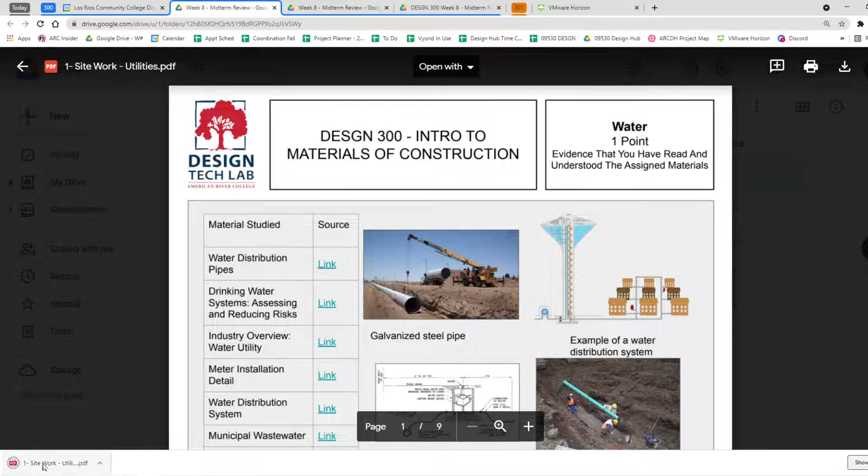So what I'd like to do is go over some of these and just make some comments as to what I'm seeing. Let me go ahead and download this one and then open it up, it'll be easier to work with. I don't have annotation tools on here, it would be good if I was doing this in something else, but let's take a look at this. So as I review these, I always look to see what's supposed to be done.

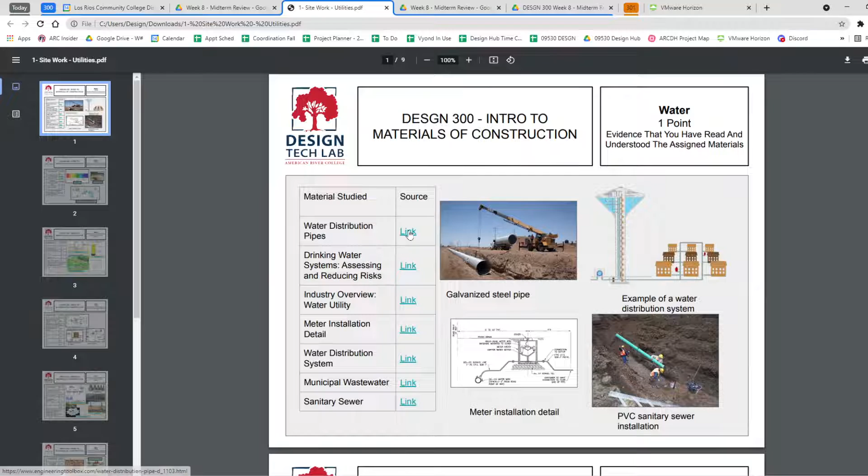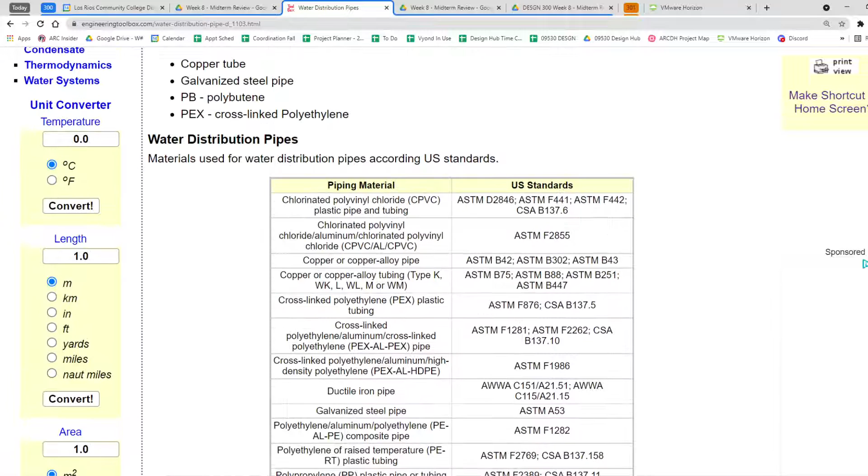It says show evidence that you have read and understood the assigned materials, which is about water. So the first thing I do is look over here to find out whether you've hit the links and looked at the materials given to you in the readings. This one I see a lot, and I can even follow these links to water distribution pipes and talk about copper tubes and piping materials. So, yep, that was one of the ones that we looked at.

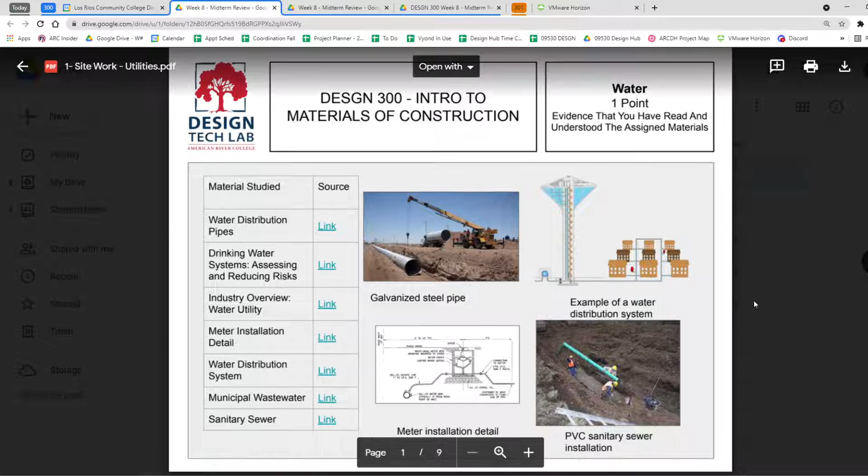And drinking water systems - this is a really good one right here, actually. It's blanked out right now, but this is right here: why are drinking water systems crucial? Serving high quality water, so that's good to know. So I look at these, and then I look at these to see if they're really giving the idea about how water works. This is one, and I recognize it from one of the readings, so I know that was there.

You might be asking questions - well, why are they doing all this? Why pump all this up and then let it come down? Why not just pump it? Those are some really good questions you might be asking, and there are very good engineering reasons for it. If you become a hydrologic engineer, an MEP - mechanical electrical plumbing engineer - a hydrostatic engineer, or just a water system designer, you'll eventually be told about all that.

And I really like this one because it's showing an Archimedes pump, which is really cool. They're showing just enough pump pressure to bring it over to here, and then they use an Archimedes pump to bring the water up. And then, of course, they can do that at a slow rate and fill this up. And then when the water is needed, you have a constant pressure until it totally depletes this reservoir at the top. So it's a way of buffering, so you don't have to have such a big pump - you can have a smaller pump that's running constantly, and the positive displacement pump is very, very efficient. So this one's really cool.

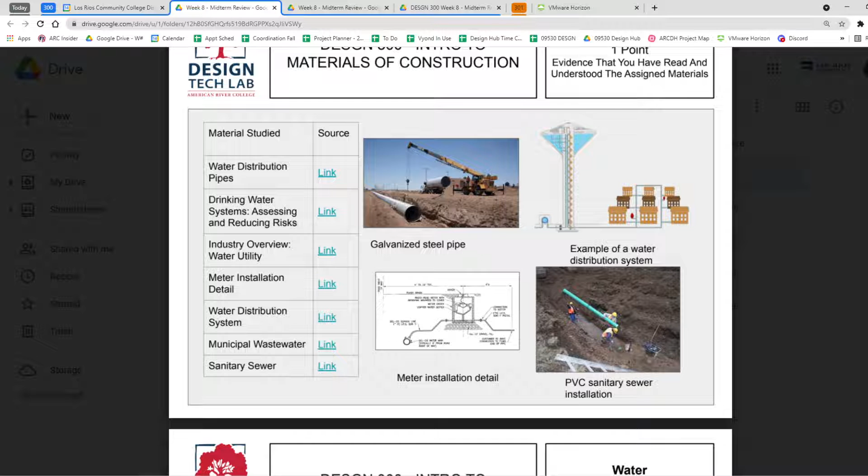I like this one, I like to be able to talk about it. Okay, showing that water comes and it's part of site work. This is nice, showing water and site work. So this one has a lot that is cool about it.

This one's also really cool because it brings a couple of other items into it, and this is nice because this is a new one for me. I hadn't seen this graphic before, and it really does explain a lot when you look at it, and it's well marked as to what I'm looking at here.

It would be nice to have a little bit more about why pH balance is important and what it should be at. If you have perfectly neutral water, that's actually bad for your pipes, it'll corrode them. Usually you have slightly alkaline or slightly acidic water, normally a little toward acidic, not so much down to number 6 on the pH scale, usually in the 6.25 to 6.75 range. If it's perfectly neutral, it's too corrosive.

Another thing that I like about this one is that it's got keywords, because keywords will allow you to do more research later on. Now, some of these, I don't know what customer advances means. I don't know what CIAC means. So those would be kind of cool.

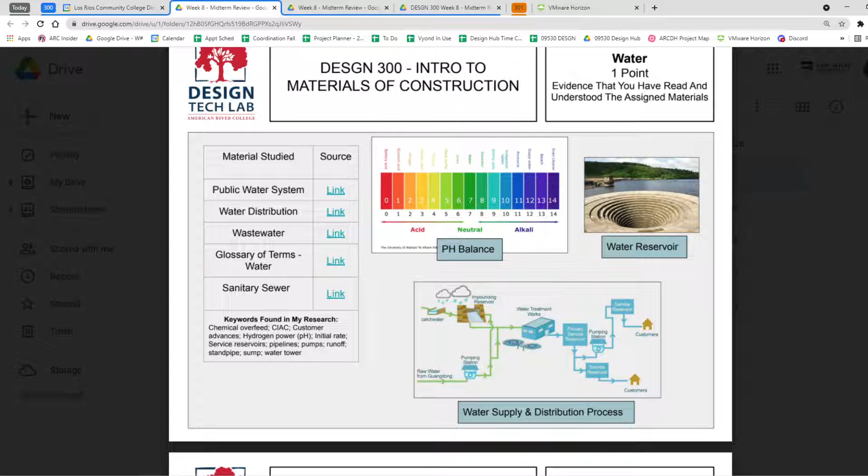And this is really typical. I've had to work in these underground vaults quite often. There was one that I refused to work in because it was about 30 feet deep and the water pressure was 250 psi. If one of those things sprang a leak, there'd be no way for me to get out, period. So this brought back some interesting memories. And I've worked in these that were just fine too, so that's kind of cool.

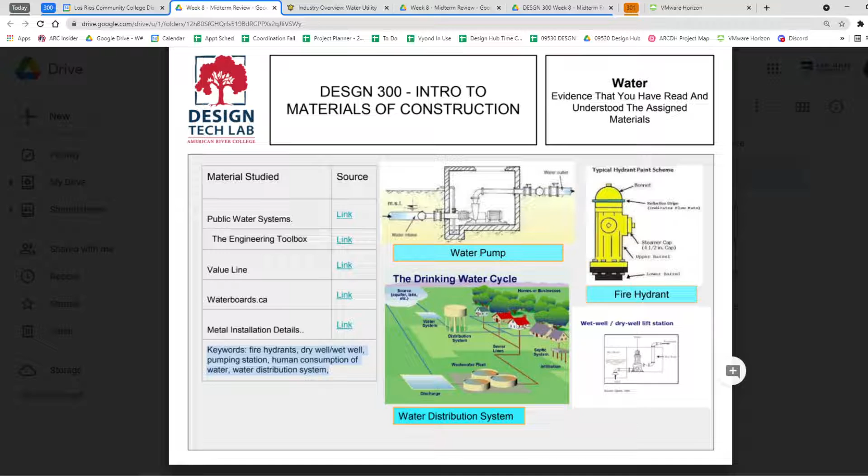One of the more interesting ones I worked in was at the pump station at Cal Expo, the big fountain that you can walk around in. There's a great big pump house down below that, and they were looking at retrofitting it, and I got to do some work with that. So that was really cool. So these are good, this is really good.

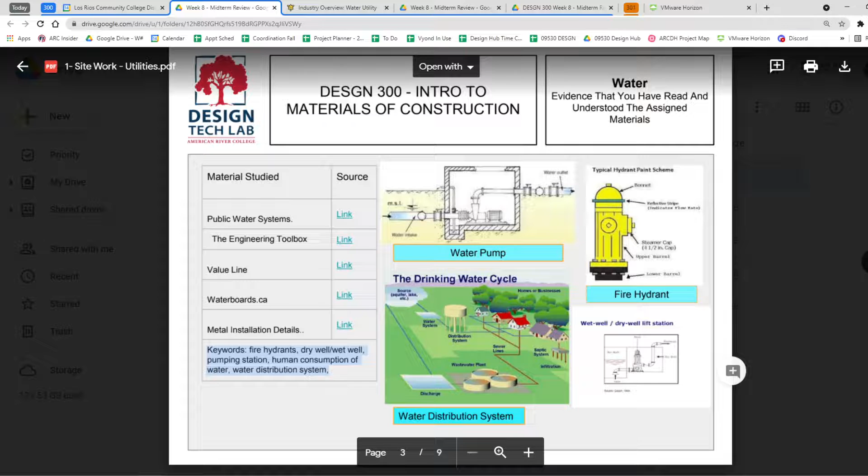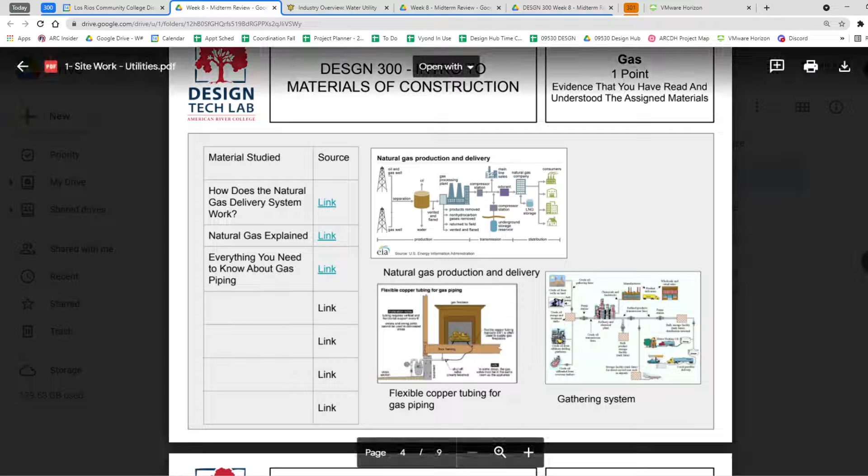However, some of the really nice things about this are that they're very clear and easy to see the differentiation between them. These were outlined, very clear and crisp, so the snips worked very well wherever they came from. There's nice border separation so that you can see it very easily. So those are some of the things that I appreciate on this one.

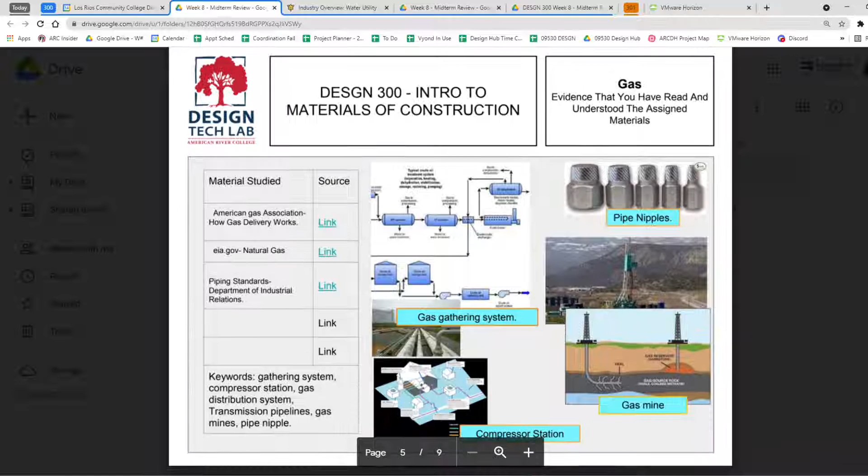This one's really cool because it's got a lot of system work, and we don't think about gas so much. Again, it would be cool if these two were removed. But this is really kind of cool, and I like this gas gathering system and a compressor station. And wow, a gas mine - you don't think of it as being called that, but that is what it is. So this is really cool.

Natural gas is pretty interesting in how it gets moved around. It's often very clean from the point of view of carbon emissions, but the production wells are very dirty from the point of view of methane. There was a really nice interview on NPR about the difference between methane and CO2 when it gets into the atmosphere. Methane is not as prevalent as CO2, but it goes away quickly, and the CO2 doesn't. So what's up in the air right now, we have to scrub it out if we're going to think of improvements. But the methane you can hit really quick and it goes away, so if you can get the 2 to 3% of the problem gone from methane, maybe that's what should be attacked. So that's kind of cool.

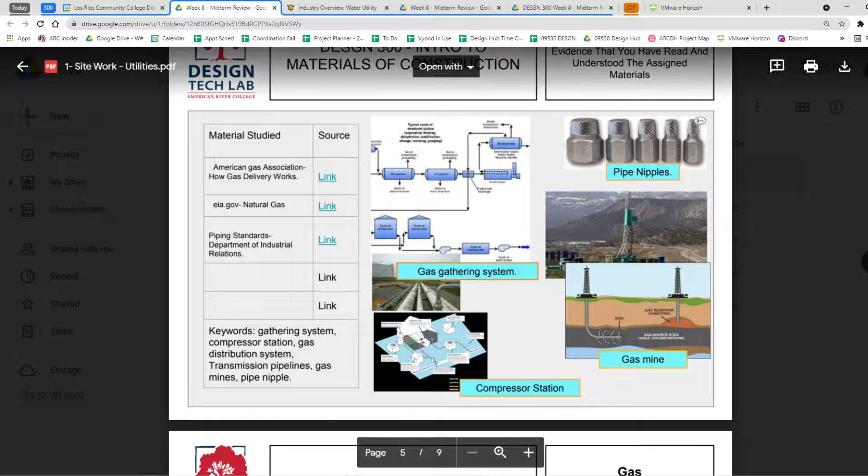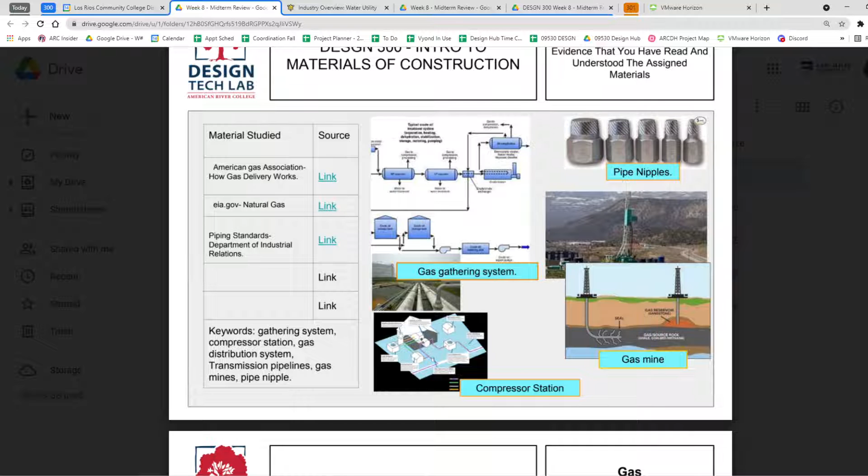But I like this one, and believe it or not, I sit here and look at these diagrams and go, oh, that's really cool. Sometimes I remember working on systems like this - I was a pipe and water and gas and tank person, and I worked on gas fields and oil fields and nuclear power plants as part of my work in industry. So these things got stuck in my brain, so when I look at one of these, I sort of know what's going on with it. So this was a very nice one also.

This one is just naturally nice looking. The person who did this one has just an excellent view for graphics. The colors that were chosen sort of match out with these. So that was really nice.

I don't know if these were all... sometimes finding these types of images that have a clear background so they sit right on top and really pop out - they're hard to find, so I don't know where this one was found. It was really, really a good one. But this is just a very pleasing to the eye presentation. There's plenty of space around so that I can pay attention to what's of interest. And it's definitely showing what those systems are like and some places to go to get information. And I like the keywords down here.

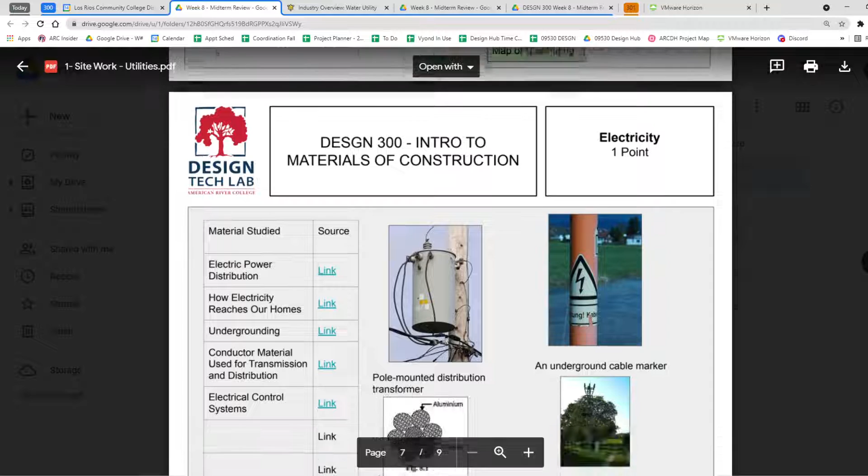Okay, this one's very cool. And look, steel cored aluminium wire - that's really something else, something to really think about. Why is there steel in the middle and aluminum around the outside? Don't really know why. You might also notice the hatch - that's the typical material coated hatch for aluminum, and that's the typical hatch for steel. That's really kind of cool.

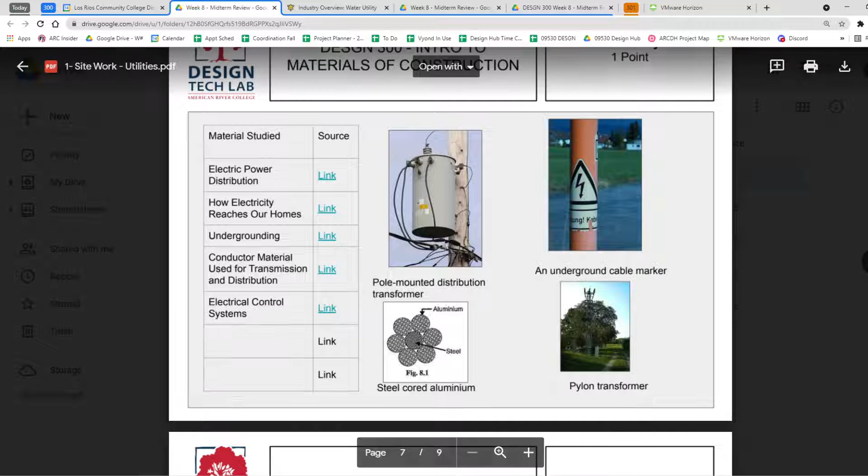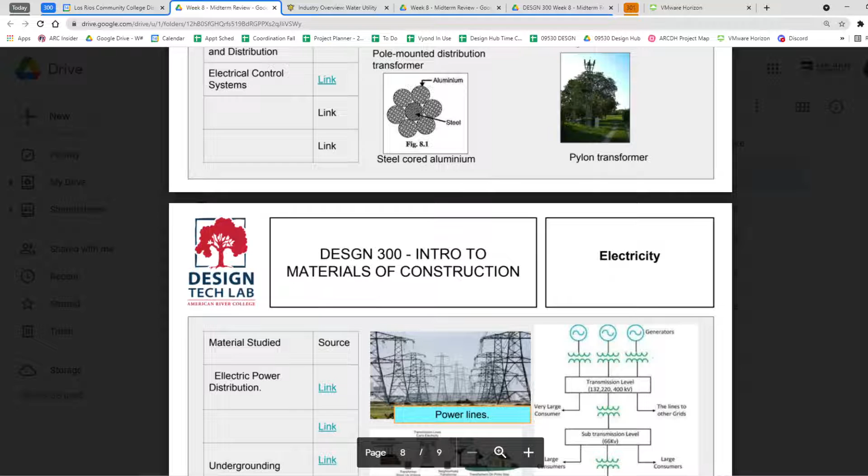All the ones that you're seeing on here would receive full credit or did receive full credit. Now sometimes there's a few things missing that get lost, so those can be brought up and made clear later on.

But this is also nice - I like this type of layout where you have one large one that takes up about half of the visual space, and then the other one is cut in half the other way. This is a very nice way of organizing. It's a little bit chunky that this brings this to my eye a little bit hard, just because it's bigger than the other ones with that little space at the bottom.

Welcome in, Nasma. Maybe there's an actual line there that you could delete and it would bring that back up and in.

But these are cool, there's some power lines. There they are right there, the high energy power lines. That's really nice. This is talking about a substation, which is right here. And so this is all tying together very, very well.

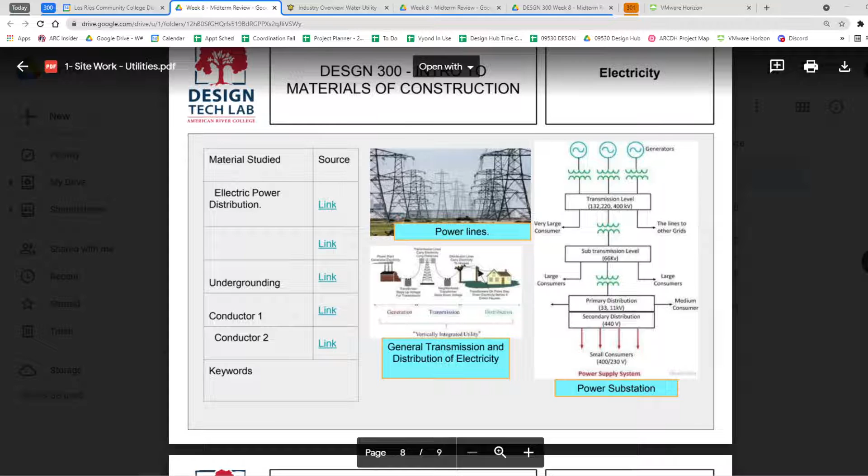Very nicely done. I do like to leave the instructions here so that somebody who is reading this knows what it's about, knows that I'm presenting material that was given to me and that I had to know about. That's kind of cool.

And then when we look at these, conductor 1 and conductor 2, I'm not positive what those are about, but these are conductor materials used for transmission. That's really cool because this is a material resource class. And then this one goes probably to just what material conductors are all about.

So this is really showing some good secondary research that went on with this one. So I kind of like that.

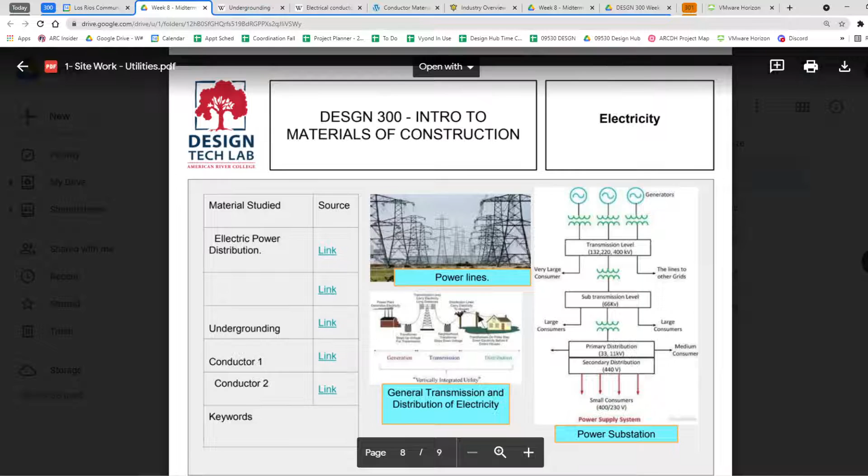That one's really nice that there was some other work done, and what is there to underground, and you can go back and really look at some of this stuff, and you can see that this is where this came from. So it's good. And this one, so you can tell that they actually did read it because those show up. Oh, those actually showed up on a different one. Those showed up on this one. Okay, so those are really good.

Here's the example where those extra ones were taken out and then these are brought back in. I like that these materials were brought forward very specifically, that these are important materials to electrical power distribution. This brings into that whole idea between AC and DC.

And we think that there's, oh yeah, I've got AC at my house. Probably, except for your air conditioner, probably 70% of the power use in your house is direct current.

TVs, refrigerators, most washing machines, clothes washers, computers, lights, many, many, many lights. Almost all the LED lights, all the fluorescent lights are actually DC. Tons and tons of stuff is actually direct current.

Little space heaters, most of those are direct current. Just so much. Your phone and the charger on your phone.

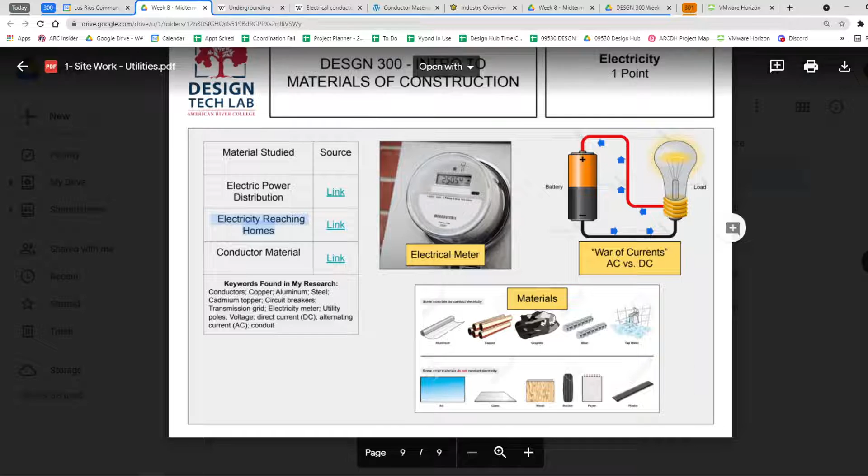So this is all interesting stuff, and this idea of AC versus DC is crucial. So happy that somebody brought that up.

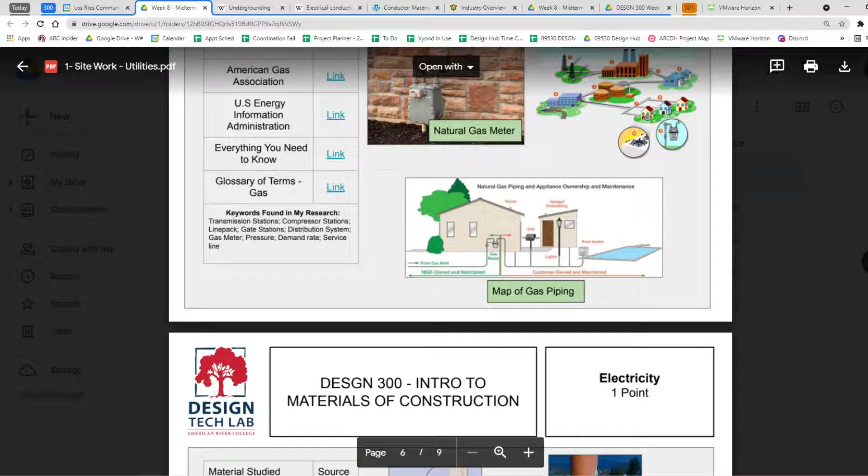And you can do a lot of research on that later on. But it's really, really cool. Okay, so those are some comments on

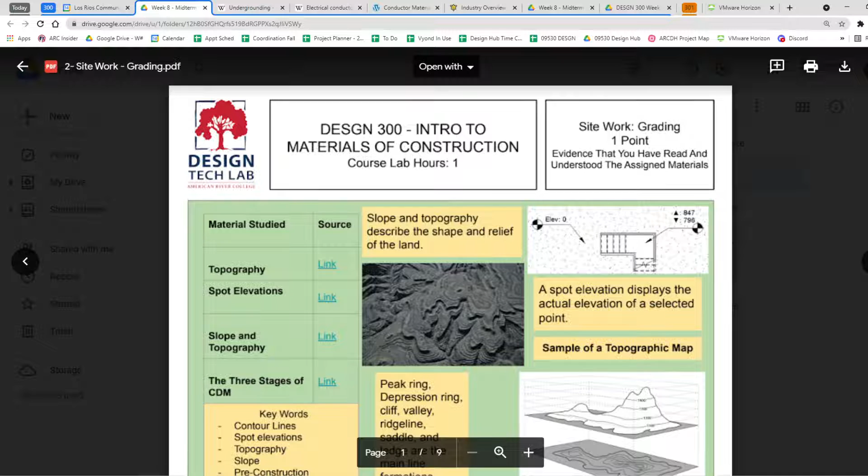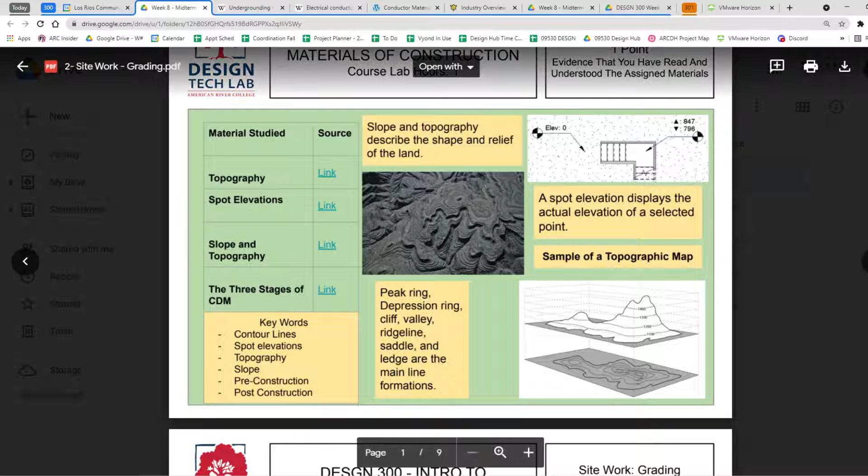I think you'll probably see it most on these ones too. This person has just an excellent grasp of visual layout. Just a wonderful graph. When you look at that, your eyes are just drawn right to this, and drawn right to this. And I don't know how to do that personally. I'm a mechanical engineer, and a tic-tac-toe board looks really, really good to me. But I do know the effect of this, my eye is drawn.

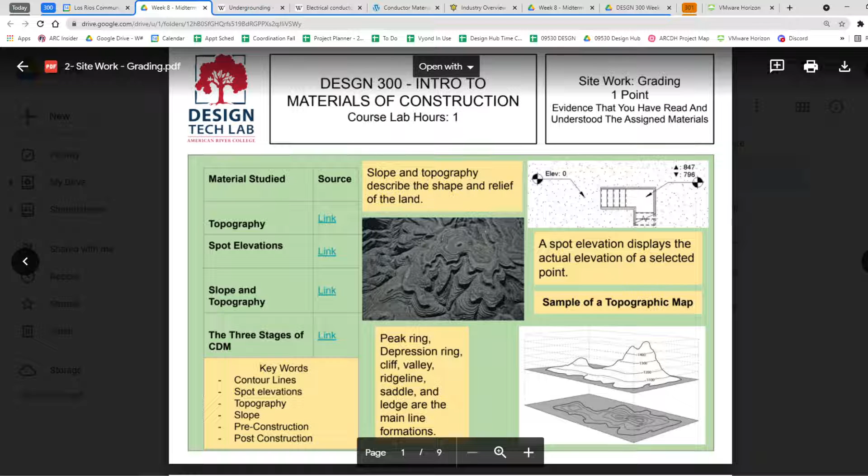Very, very nicely done. So if you want to post something about this and say, whoever this is, can you give us some hints? That would be wonderful.

This is another one I really like too. It's so cool to have visuals like this in there. So these are all cool. Missing the links would have been good to have those.

This one up here, you can actually highlight that and then turn the highlight off, and that might be a nicer way to present this. But this one's really nicely done for

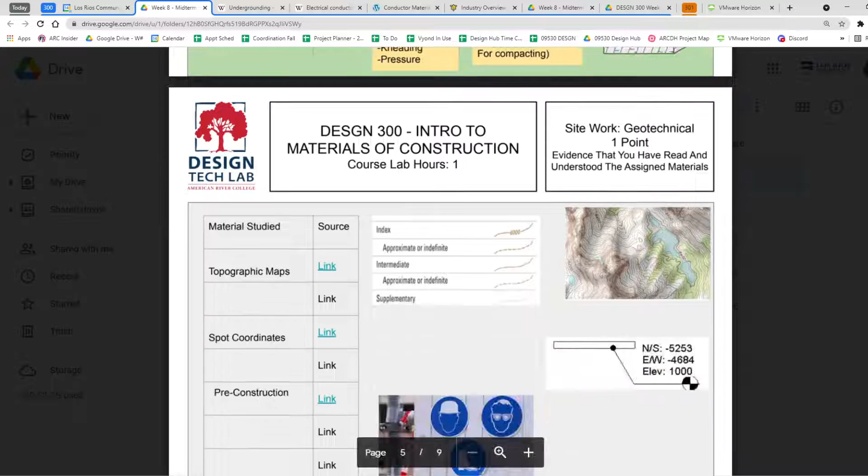This one has some open spaces here and here, and it makes me wonder if there was something missing that they were supposed to look at. Now, I happen to know, okay, well, this is pretty cool. They hit the three things that I was really looking for.

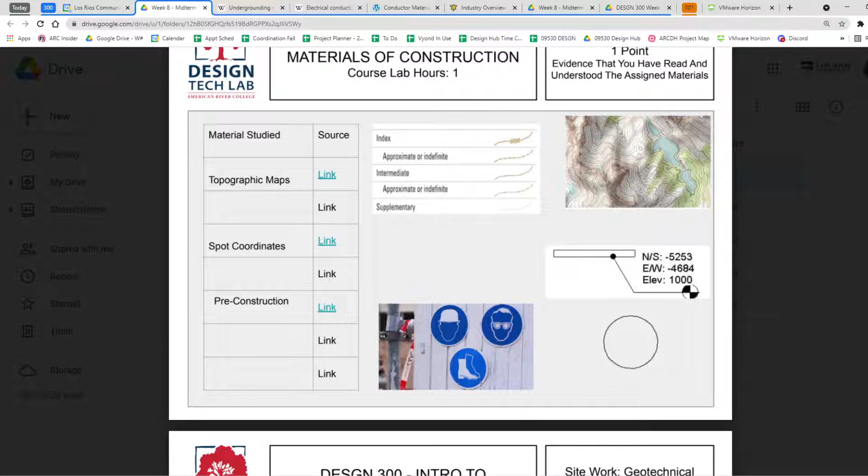But this layout makes my eyes actually draw to the empty spots instead of to the spots that maybe would bring my eye to better attention. So this one, maybe the fact that it's so tight over here with a lot of room over here, but all the information is good on this one.

Okay, so here I get 1, 2, 3, 4, but I only see 3. So maybe an additional image would be good on one of these. But this is all good, right? They definitely went in and found those ones that I was looking for. Maybe eliminating these empty ones would have been cool.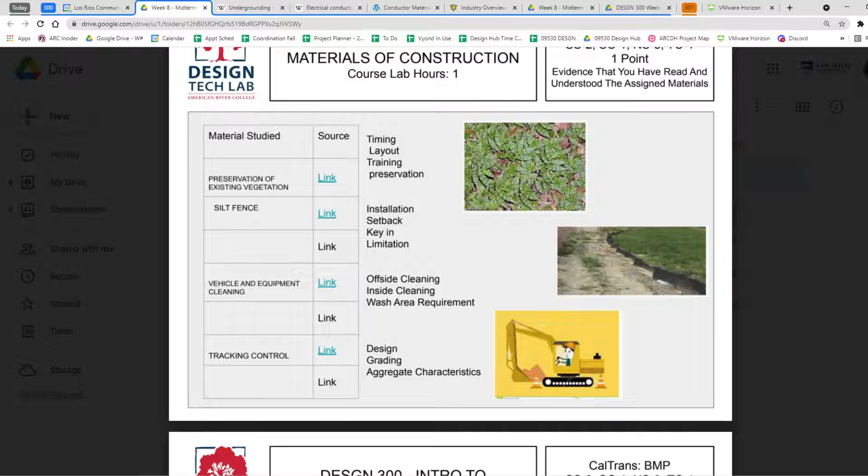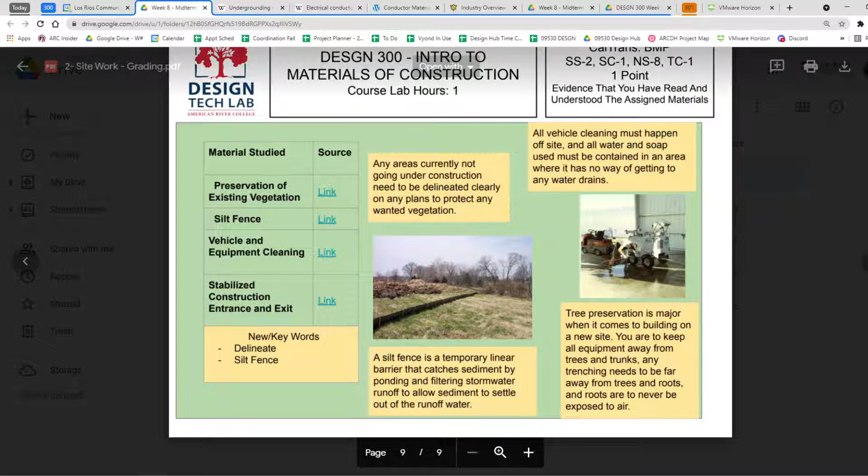But this very definitely tells me the story. This one very definitely tells me the story. And this one very definitely tells me the story. So hopefully you start getting the idea that you can go back and look at these critically.

To critique something means that you have a set of standards or goals and you compare against those standards and goals. Some people think critique means to criticize, and it does, but that term now has a bad connotation—when you criticize something, you're only saying what's wrong with it, that it's not good enough or wrong for some reason. Whereas what the real root is, which is critique, means to compare against a standard.

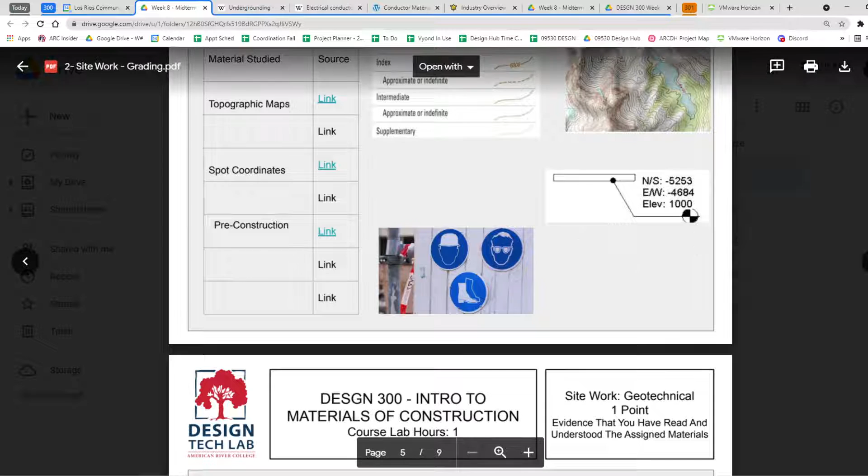When I give a critique of these, I've got certain standards. You can tell that standard says there needs to be empty space, but it needs to be done in such a way that you do have all of the information. If I were to just look at this as an example, I'd say empty, empty, empty. I wonder if something belonged here because there's empty and empty. So it's very unhomogeneous. Where here there's a lot of empty space, but it's very obviously full and complete. I see 3 things over on the left, and I see 3 images that I can probably match them up with. So you see how that critique sort of happens.

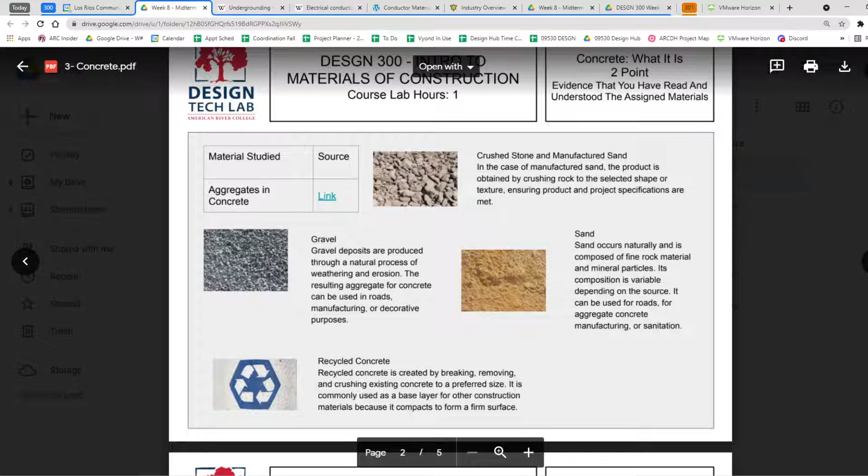And then here's another one that you could go through. Same thing—this is pretty good, but I've got sort of a missing spot down here. Whereas if this was centered up, it might provide a little bit more. I do like the way that these are well annotated. This is very, very well annotated. I really understand sand from the point of view of concrete and crushed stone from the point of view of concrete. So this is very nice because it brings these materials, which can be found in other end uses, and brings them to concrete.

Here's some more. So this is really cool, man. I don't even know what that's showing me, but it makes me want to learn it. I just like it. Here's a term I don't even know—makes me want to go learn it. So this is cool, and this is very, very, very well done. That's showing that before it's done.

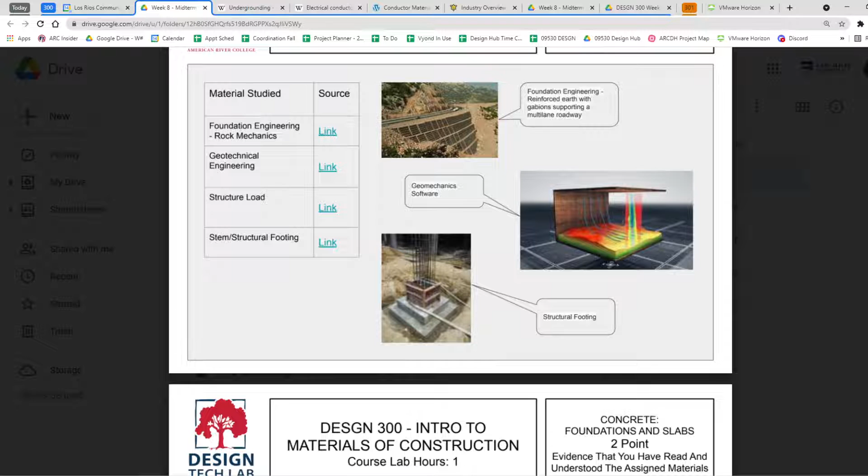So I like this one, and the use of these comment box things is really pretty cool, right? A lot of times you'll see me using a box and then a line, but this really, really brings it to the fore. This one is cool, but I'm not sure that they did any new work because I remember providing this and I remember providing this. So I'm not sure that these were actually accessed and went and reviewed.

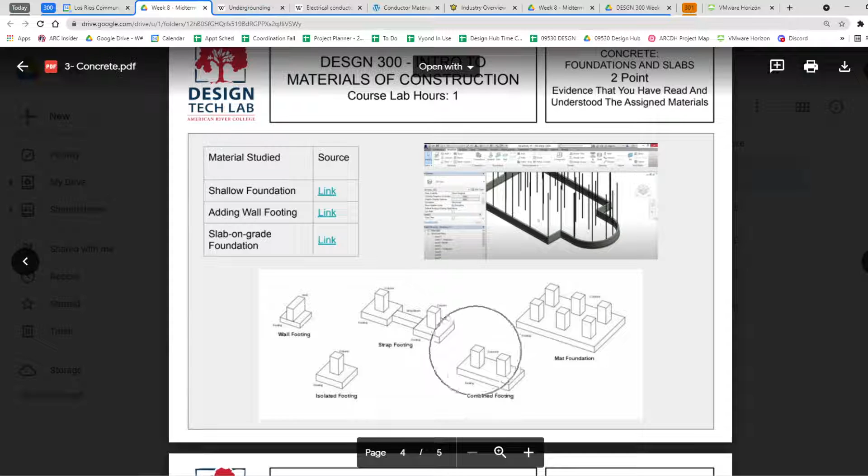The layout here, though, is excellent. I like the way this is laid out, although there are 3 and there's 2, so you might want to show where that 3rd one went. Okay, and so this one is kind of cool too. Found the one graphic, and that's good, showing it all.

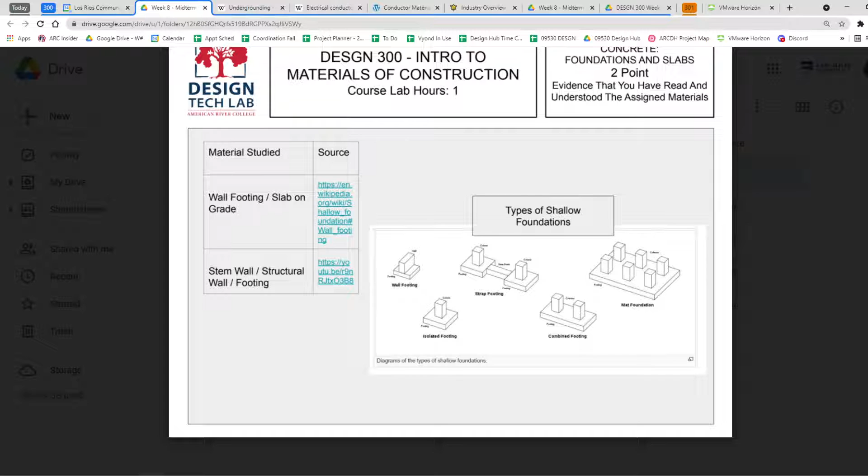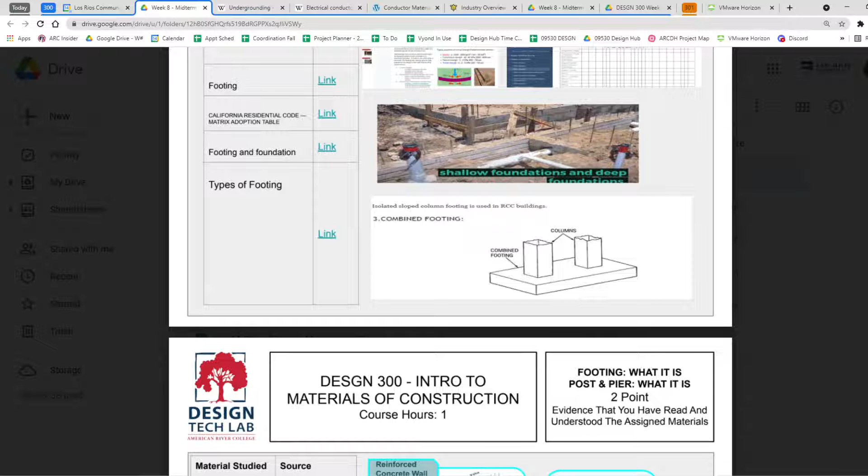Now, one of the things I see here is that this has been stretched sideways. I can just tell from the way this font looks, and we try to avoid doing that, because it just looks stretched. I prefer to be able to see things in their natural state, so if you can avoid stretching, that's a good thing.

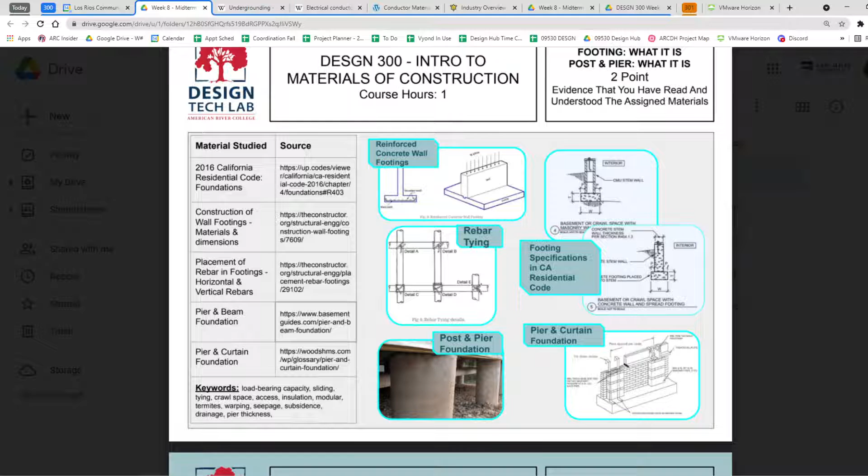Okay, this one's kind of cool. I like that—it brings it all together. I like using the different shapes. These are kind of neat. I like them.

And this one, I can see that there's some overlap issues. As you can see when I look at it, I wonder if there was something over here that I'm missing. So this one might have been either chopped into two or just show the image. But this is not showing any kind of original work. It looks like you just cut and pasted the stuff that I gave. So this one is not really helping things out.

But then I go, oh, well, look at that. And look at that. There's some real good new information. So, yeah, you went and saw the Google slides that I had. I'm not positive that this link was followed or this link was followed. Let's see if it shows up in here.

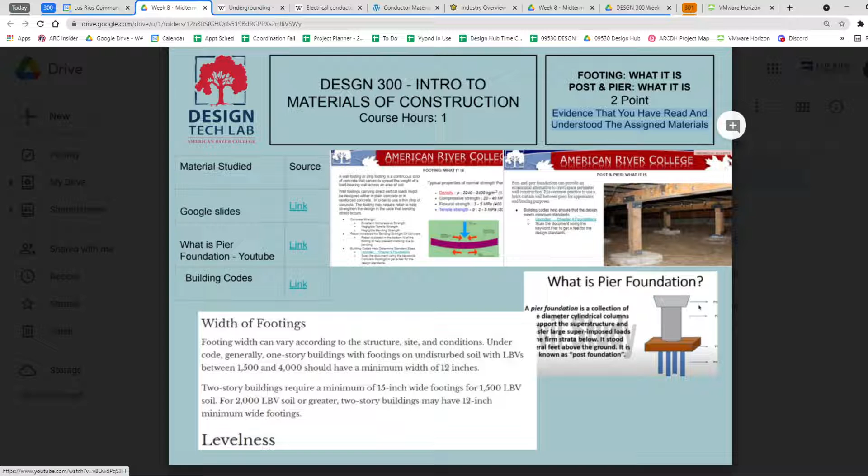So that one's cool. So this is good, but there's a few things. This little overlap here, this overlap here. I'd like to see more of the original work on. And do check your links. Sometimes you can accidentally click the wrong one and put it in there.

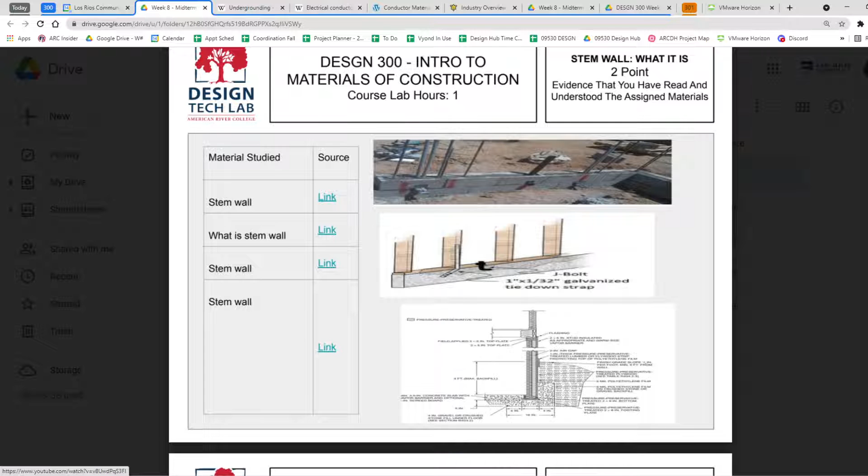This one got stretched. This one got stretched. This one got stretched. See how hard it is to really view those. So that's just a little bit of information that you can go back to.

And here's some more. You can see that this person has a style, and that's cool. If you have a continuous style throughout your presentation, nice. People get the idea of what to look for and what to look at.

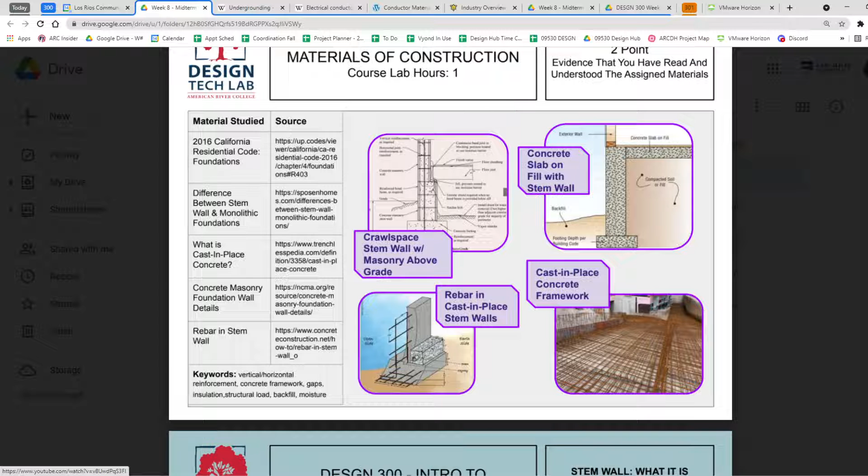This is cool because it's sort of tic-tac-toe, 1, 2, 3, 4, but they're offset, right? They're not all lined up perfectly with each other. It's okay if they're not all exactly the same sizes. It sort of gives me a nice view. So that's kind of, I like that. The colors work well. We got the keywords. This one looks good.

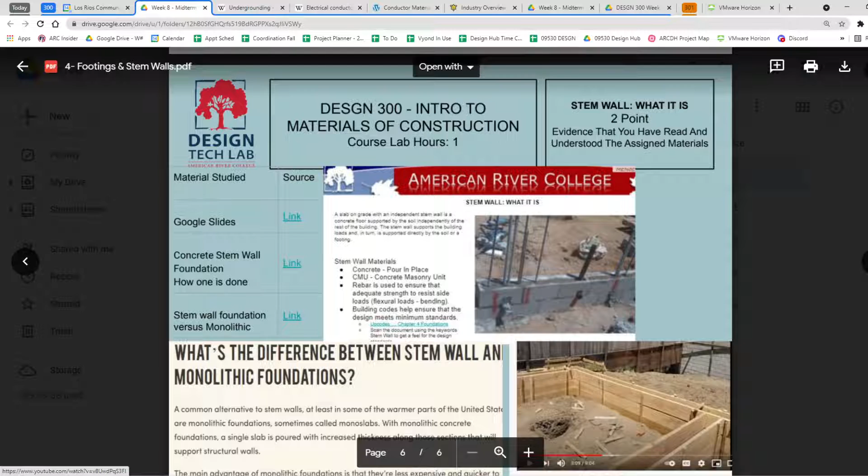Now this one again, you know, in this case, it's sort of working. It's sort of working, right? Because of the way this is cut off and the way this is looking, it's actually not bad. And I have had some graphic art students that really understand that things can overlap and you don't need stuff around. So for some reason this is working, but again, I'm just getting the Google slide in here, and it'd be nice to have some of these other links in. And this one has been stretched a little bit.

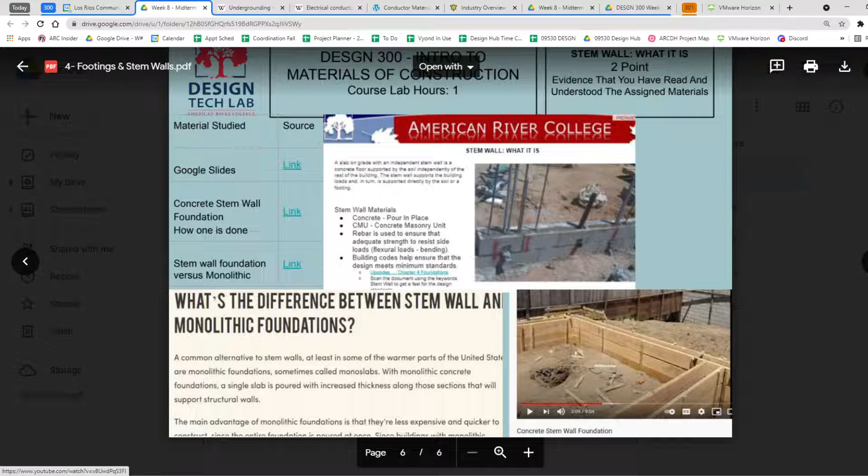That one is just plain good looking. I don't know what you guys think, but it's good. It's so pleasing to the eye that you want to sit there. Oh man, I want to read this. I want to do more. I want to get into it and look. And again, I can't teach that to you, but maybe through assimilation and looking at other people's work, we can get some hints on how that works.

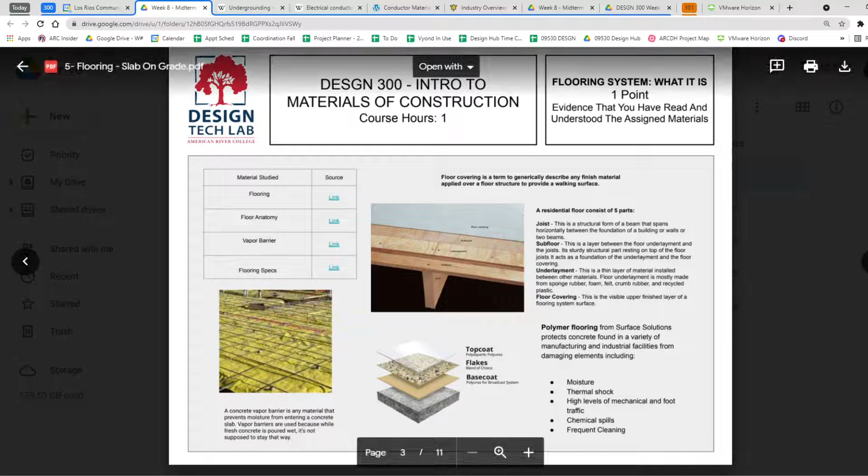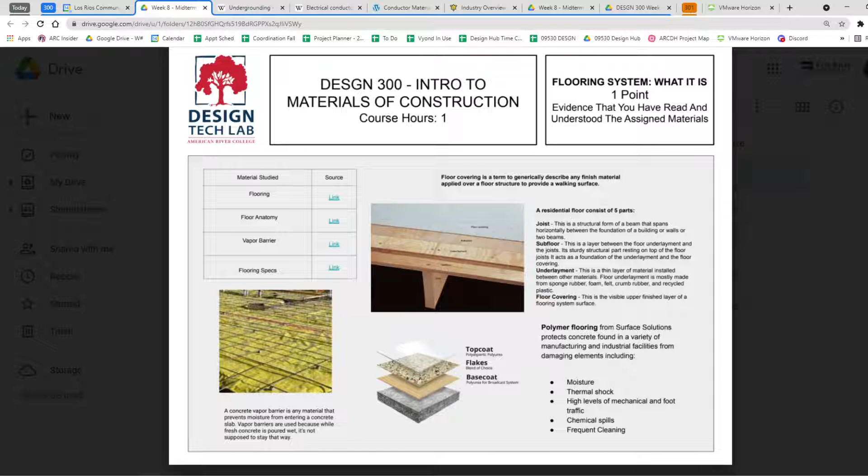But this one is so cool because we've got this image, and then here's that text I was talking about. And then this is talking about, so this one really shows how you can really do some good annotations to go with this.

Now these are just really, really nice looking, really, really good. And look at this image here—does that just tell the whole story? It's great.

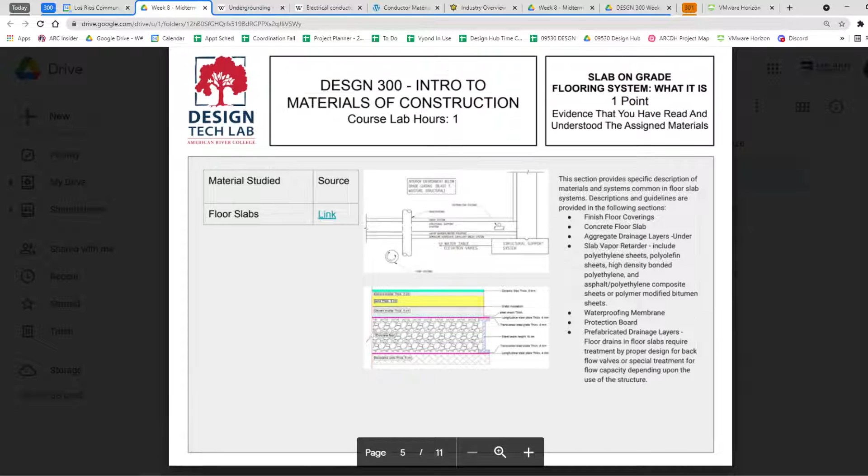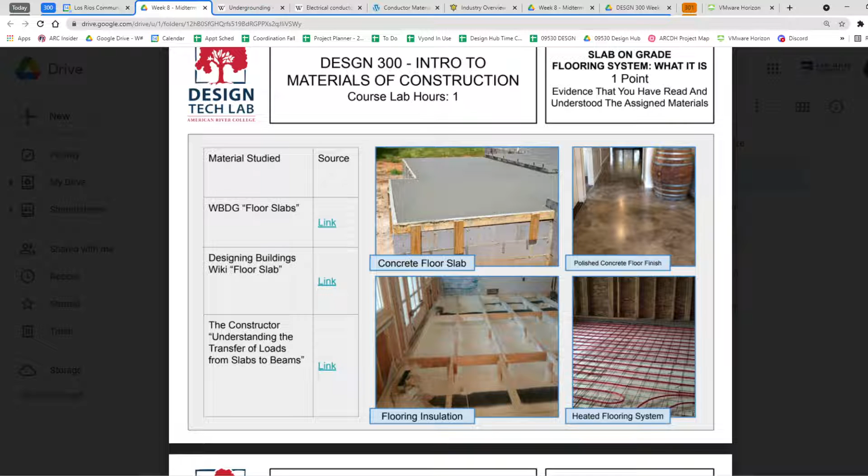Here's some of that floor slabbing detail work. Heated flooring systems—that's really cool. And look, here you're seeing a stem wall with a slab on grade foundation. This is really cool, it really shows the flooring insulation.

This one's really nice. This is cool because it's saying this belongs to both of these, and there's some annotation with it. This is a nice technique here, very, very nice technique.

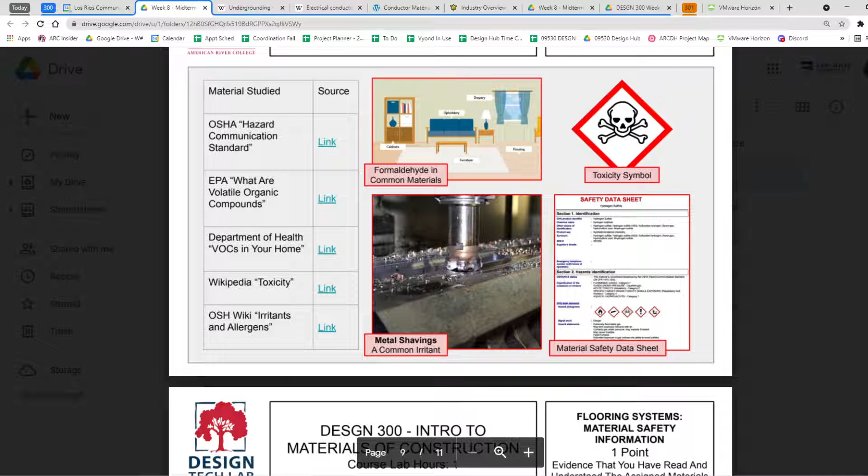So there we go, I'm just going to buzz through some of these other ones. Really, really looking nice, so I'm seeing good work—so much good work in this class. So that's what I wanted to go through.

That was just a little bit of a look through the great work being presented by everybody in the class. Keep it up, but do get some good ideas from these. It's always good to look at others.

One sign of professionalism is that your work is of a visual presentation level that other people want their work to be like yours. That doesn't mean they should be copying you, but if you have a style and a way of presenting your work that other people want to emulate, that's one sign of professionalism.

The next sign is that you help people get it—that if one of those was yours and somebody asks how do you do that, how do you get there, what did you learn, that you're free with your information. That's another part of professionalism.